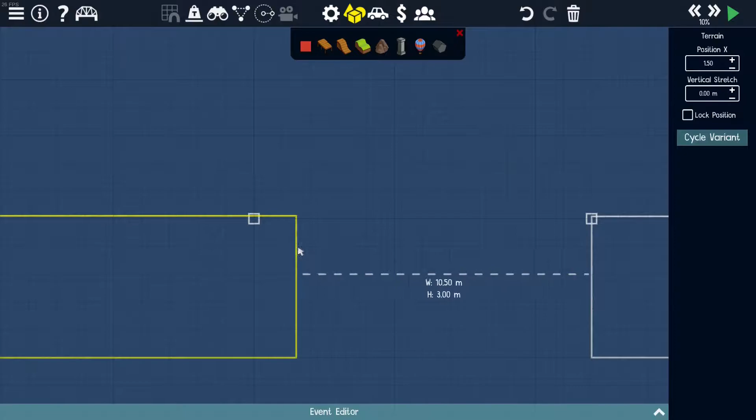In this video, I am designing a workshop level, and I wanted to make it so that you'd have two bridges and they fold up into two towers. So I started off by deciding the length that the starting roads would be. I started with a smaller one and then realized that it could be better bigger.

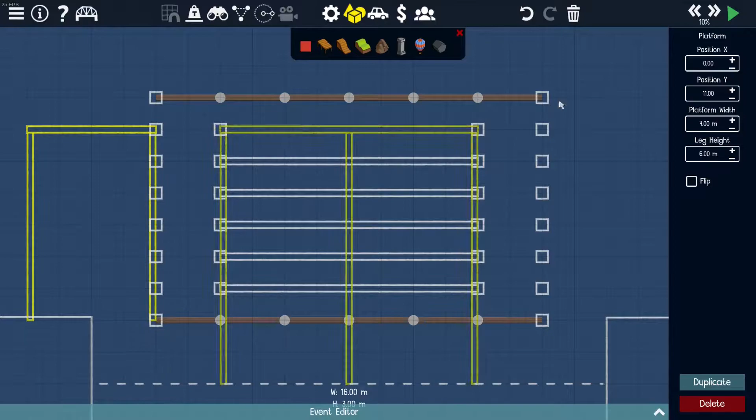Next, I added in all the static joints for where they would have to move to in order for the cars to get across. Then I added in platforms that would support cars and also make it look better and show that everything's being supported. And I added in joints in the middle of the platforms so that you could support it easier, and it makes sense that there are joints there anyway.

I then designed the mechanism that would control just a quarter of the design because all of the other quadrants would work the same way. I connected all of the joints together so that they would rotate when one was pulled.

When I ran it, I noticed that I made the yellow part not rotate around the right point and it ended up in the wrong spot, so I deleted that. After I deleted the yellow part, I rebuilt it and I connected everything back up, and when I ran it, it worked fine.

Before I could copy this mechanism over to the other corners, I had to make sure everything was split joint so that I wouldn't lose what I had set everything to. After that, I copied and pasted it into all the spots it needed to go to.

Because the bottom left and the top right both rotate clockwise, and the top left and the bottom right both rotate counterclockwise, I connected up their motions so that I'd only need to pull from 2 points and be able to have the full motion. I then set up 2 hydraulics to test out and make sure this worked.

I had it working with 2 hydraulics, but I wanted to make it just have 1 because I like having 1 hydraulic challenges. At first I thought that I could just use an inverter to invert it from counterclockwise to clockwise, but then I realized that it would look really good symmetrically.

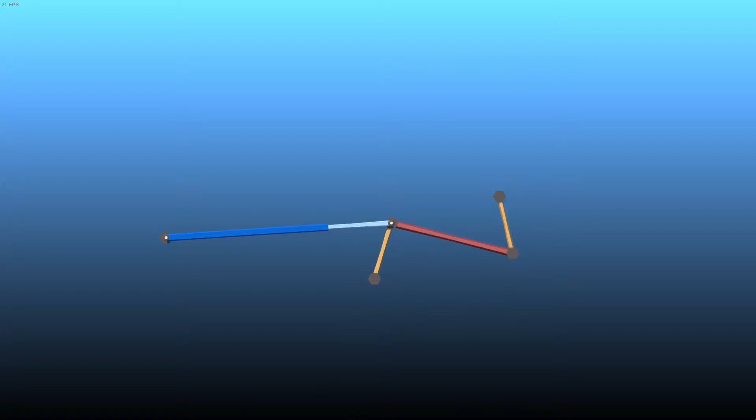But there was one problem, which was that I had never done symmetrical things before, and I needed to learn a linkage called a grasshopper linkage in order to do it properly. The grasshopper linkage is pretty simple, but I had never done it before, so I looked up a video on a grasshopper linkage, and I knew I was getting a great video when they had music like this.

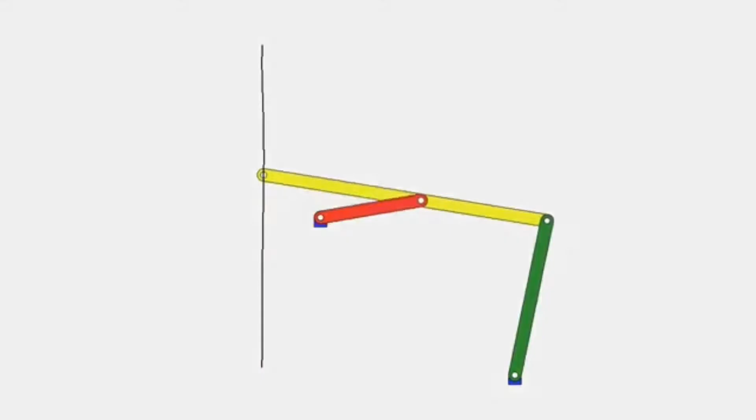The video didn't really show the context I should use it, so I tried to kind of make it up, and after a bit of trying I realized that I was not going in the right track at all. So then I turned to Discord and asked Arglin to help me. And quickly he replied, and I used his design in order to make my own. And then I integrated this into my design. And it's worked.

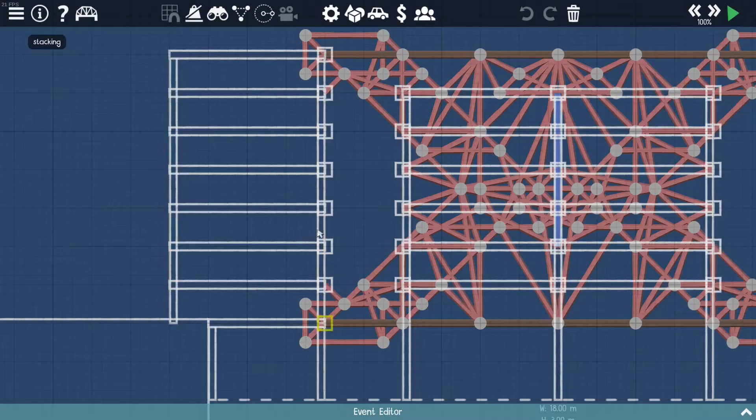The next step of designing a workshop level is to actually put in all the cars and do the phases and such. I'm using compact cars because they're the best car and there's no other car as good as them. I started with just the bottom car to make sure that the braking force was good, because it's annoying to set up the braking force for every car separately. I wanted to set it initially and then just duplicate that car.

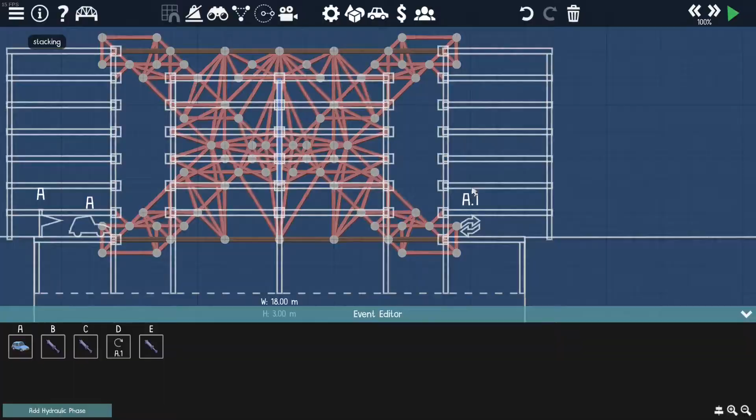And then I did the top car to make sure it was all set up right. And then I added in all the other cars, and I set up their flags and checkpoints. It turned out that the braking force wasn't amazing, so I had to go back and change it later though. I ended up getting it all working fine, and then there was only one last step, which was setting up the budget and materials to be correct. So now I'm just going to show you a few replays of the final version.